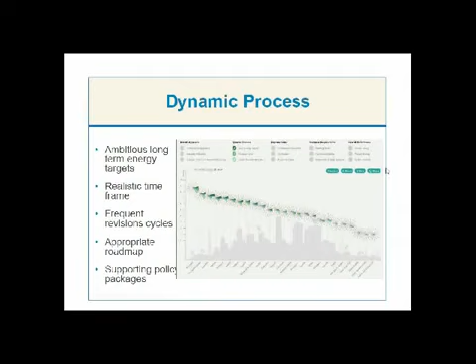How have they established revision cycles and developed appropriate roadmaps? This criteria acknowledges the importance of dynamic process in ensuring significant decrease in energy consumption. As part of the theme, the criterion sub-criteria assessed whether targets set within were set within a realistic time frame and were accompanied by a roadmap that's appropriate for achieving those targets. So you can see here, this is a screenshot of the slide where we've just ticked all of the elements under dynamic process, and you can see how countries have rated under those themes.

This is another screenshot from the website where we've just focused on zero energy targets. And you can see, as I emphasized earlier, some codes have scored well, while others, if they had zero energy targets, they were lacking roadmaps and other supporting measures. But there's definitely a lot to be learned from the codes that have scored well here.

Revision cycles, this is another screenshot from the website. You can see again that there's some good examples of best practice. Well, we can certainly learn in other areas from other codes.

As part of the dynamic process, we also considered levels beyond the minimum standards set within the code. And we wanted to see if these levels have been encouraged by labeling or certification schemes, and if code developers were encouraging developers to clearly define classes and exceed the minimum standards set within the code.

To conclude with, there's clearly a need for stronger energy targets that are supported by frequent revision cycles in a number of jurisdictions. While on the other hand, we've seen that there are a lot of positive examples out there, and we'd really like to learn from these positive and practical examples and to see how countries have been implementing these targets and revision cycles.

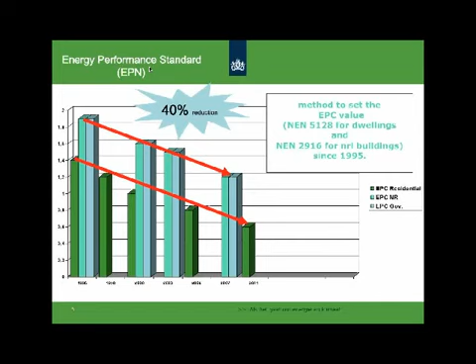That's quite a sufficient number.

If we look to the future, at the moment we are working towards what we call the road to 2020, because in 2020 we want to go to really zero energy buildings.

Both the Netherlands as well as the European Union have set targets to reach this goal, and the graphic shows the way to that zero energy target over the years. So we have an EPC at the moment of 0.6, and we go in 2015 to 0.4, then 2018 to 0.2, and then finally in 2020 to 0. I will explain later what that means.

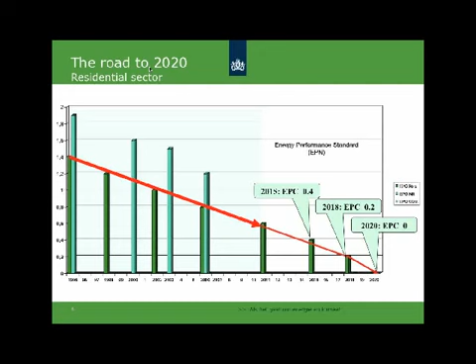For the non-residential sector, we have a more or less same approach. What you can see here is that for new governmental buildings, we want to reach the near-zero energy building, or EPC 0 level, at 2018 to set an example for the commercial sector. And these are also the targets we set European-wide.

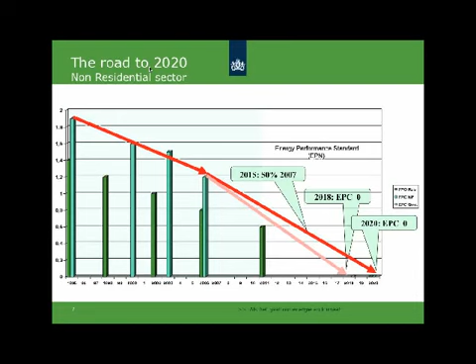I think Kevin will show figures like this later in his presentation. How do we do that? Because you can say, okay, we just lower the target or raise the target, just as you see it. But what's the approach behind that? How are we setting the height of the EP requirements?

Well, we started with the development of a set of reference buildings reflecting the Dutch building stock. Then we calculate the cost and savings related to the proposed energy performance level. That gives you an idea how much it costs to get higher quality in the market, and what will be the savings, not only in energy but especially in cost, related to these investments. So that gives you really an idea whether it's cost effective or not, how much it will cost, and who should pay for this.

In the more political decision-making process, we start with these feasibility studies, and in my opinion the most important part is consulting the building sector. Not only the building sector, but also consulting with representatives from the housing and social housing sector. Only once this consulting is finalized do we go to parliament for political approval. So it's not that the government sets the goals and says, okay market, go on whatever it costs, but it's really an interaction between market and politicians to get this done.

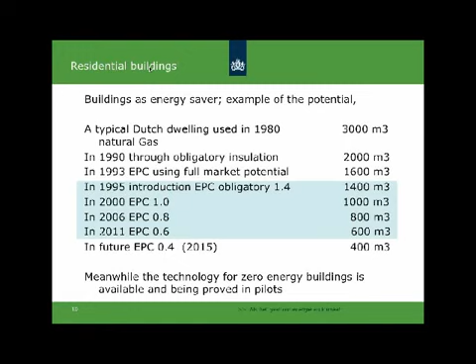Now at this moment we are at level 0.6, and the average consumption for new houses built under these codes is now around 600 cubic meters. So a huge saving has already been achieved. In this next graphic you see the same figures but shown as a graph.

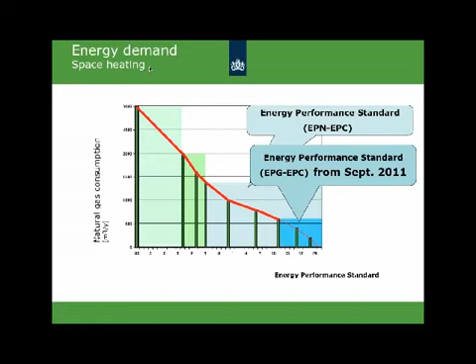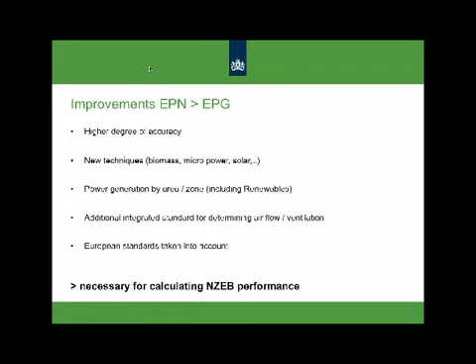Can we go on like this successfully towards the EPC zero or zero energy buildings? The answer is no, as we found out in 2010 or so. We found out that we need more detailed calculation methods, and therefore we introduced a new set of norms to get this point right. Because if you go with a very rough calculation method, it's very difficult to calculate the specific and very small savings at the end of the line going to zero energy buildings. So what we achieved was a new system with a higher degree of accuracy. New techniques were put in: biomass, micro power, solar systems and so on. Also power generation nearby houses were included. So you get a much more detailed and much more complicated methodology, but it was and is necessary to calculate near to zero energy buildings.

The interim observations at the moment, after working with this new methodology for a few years, is that it's future-proof. So this is what we will use to go to near to zero energy buildings. The steps and legislations are set. The Parliament has approved the whole road to 2020 based on this methodology, and the techniques are available. We already have a lot of houses that meet the near to zero energy building level at the moment, and very importantly, the political will is there, but will the market be ready on time? Because you can build these houses on a small scale, but can it be built on a bigger scale? And is it affordable?

What we do to get there, or to get more ideas, we launched a series of national programs and activities focusing on knowledge development and transfer, product innovation, and reducing financial barriers. I'll show you in this graph an overview of the activities which are running at the moment in the Netherlands.

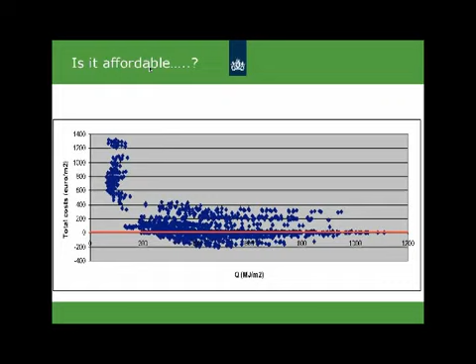I'll show you a graph now that explains a bit what's going on. On the horizontal line, X, you find the energy consumption per square meter. On the vertical axis, the total investment cost to get measures done to reach that lower energy consumption per square meter. If you look at where we are standing now, the red box on the graph is the area where we are going in now. That's the area where we need more costly measures to reach the near to zero energy goal. As we say in Holland, we are more or less climbing the mountain, and at this moment we are on the Hillary Step on Mount Everest. So it's becoming more and more difficult at this moment.

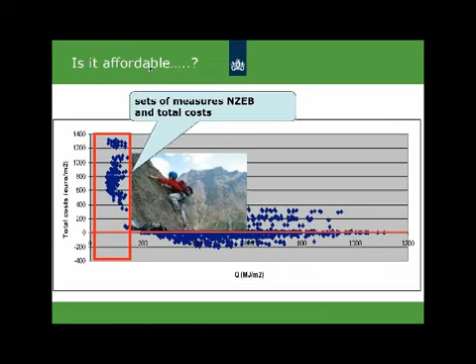But we have a methodology that gives us a good opportunity to communicate with all the involved parties and to find out what the market, what the politicians are willing to pay for the energy saving and to reach the zero energy target. The big uncertainty in this whole thing is the development of energy prices, because this will dramatically influence the outcome of the future cost optimality studies. And the question is, of course, will there really be a political will to go for the environmental targets if the balance between cost and benefits will not be in complete balance.

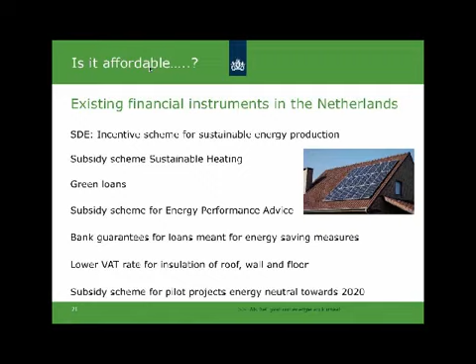Well, how do we get it affordable? At this moment, we have a lot of subsidy schemes running. That's an old approach, just buying the energy saving or closing the gap between savings and investment cost. But we see in the last few years good signs, and the good signs are that there are more and more green loans getting on the market, and we see all kinds of more market-driven solutions coming up. So I'm very positive that at the end we will reach the near to zero energy targets and the environmental targets. Because if you look at it,

the question is not if it's affordable, but maybe more, is it affordable not to go in this direction? And I hope that at 2020 the Netherlands landscape will be enriched with modern versions of our beautiful windmills, and we will get it done.

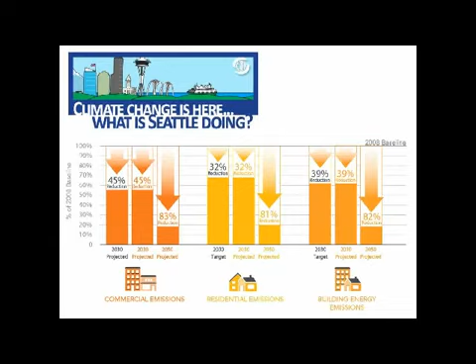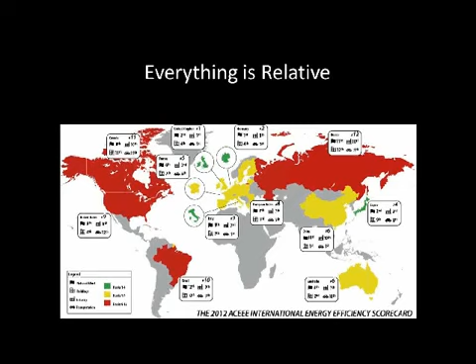We're very proud of our accomplishments here in Seattle, but if you look at them from a worldwide perspective, we're only doing well in comparison to some of the worst energy wasters in the world. So we always thank Canada and Russia, since they're the only countries with worse performing buildings than we have.

Politics and money are tightly connected. It's another good reason to make a strong business case for your code proposals. It's easy to make ambitious plans when everybody is making money, but much harder to do it when the economy is doing badly.

This is a bit strange because the best thing we could do for our local economy in the long run is to send less money overseas for fuel. The trouble is that in the short run, it costs more for businesses to change their practice than to stick with their normal practice. And climate change seems like it's a long way off in the future compared with the survival of your business this year.

So to make real progress, you need to frame the arguments so that both the environmentalists and the business leaders see an advantage for themselves. This is politically tricky.

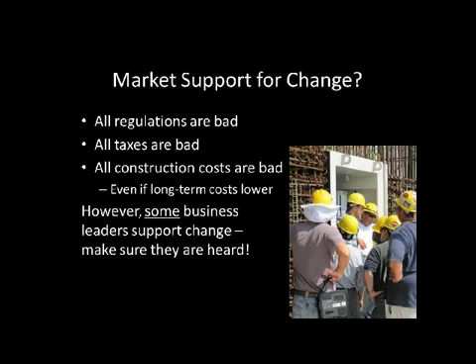Working with builders and building owners is a good thing. If we're going to develop policies that impact the construction industry, it's good discipline to prove that the energy savings will outweigh any additional construction costs. And perhaps our financiers will start valuing energy efficiency as well.

And finally, if we place a label on each building showing how well it performs, like the Michelin rating for a restaurant, the public might start valuing efficiency as well.

Anything that becomes a code requirement tends to drop in cost from what it was before, because it rapidly goes from being a special order to being a standard practice.

Since our tax policies in the U.S. keep energy costs very low compared with most of the world, it's even more difficult for us to present a business case for efficient buildings. For those of you in countries where energy is expensive, it's much easier to convince politicians and building owners of the value of energy efficiency. So tax policy is a big deal there.

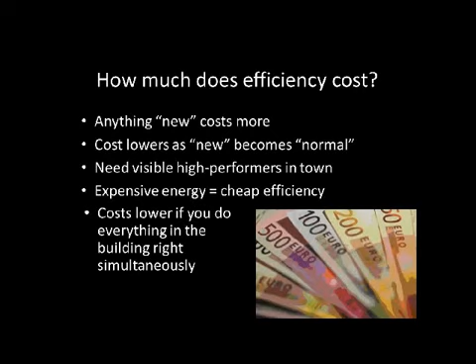Next, I want to go through a few of the new code requirements we enacted in Seattle this year. The first, our target performance path, is a simplified energy code, inspired by Denmark, that simply sets an energy use target for each building type and leaves it up to the design team to find a way to hit that target any way they like. The team submits an energy model to get their building permit, and after construction we track their building's energy use until they operate for a full year within their energy frame.

Here in the U.S. we have to do this second part because our energy is so cheap that there's not otherwise much motivation to pay attention to our gas and electric bills. I looked it up, and electricity in Denmark is about 6 times the cost it is here in Seattle. So it's much easier to get people in expensive electricity areas to pay attention to that than it is here, where we have electricity pretty much coming off of our mountains all the time.

Commissioning is our word for an independently verified study of a new building showing that all of the energy systems work as they were intended. The problems that commissioning agents discover are sometimes quite shocking. This process extends well past the construction phase and into the building occupancy phase. So Seattle now requires a separate permit to ensure that all the systems are tested and working properly together, even well after the tenants move into the building.

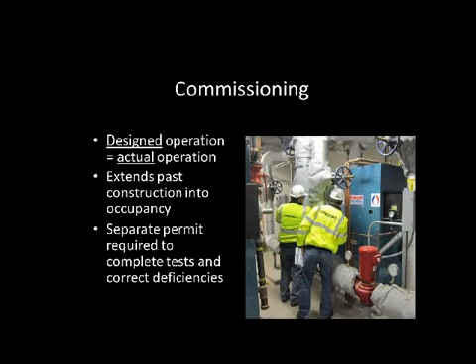When a building undergoes an extensive renovation, something that really extends the life of the building, we now require that its energy performance reach nearly the standards for new buildings. There will never be a more economical moment to improve the building's performance. And if such a huge change to a building only happens once every 40 years or so, we can't wait another 40 years to get to that point. These projects might also be able to use that target performance path I mentioned earlier.

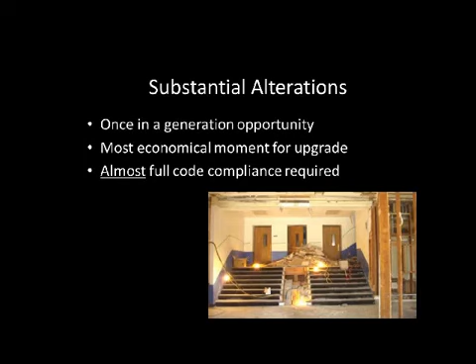Solar PV is one of the only things in the entire building construction industry that's getting cheaper as we go forward. So saving that money for a few years down the road might be a smart investment, putting money now into just making the building envelope function well.

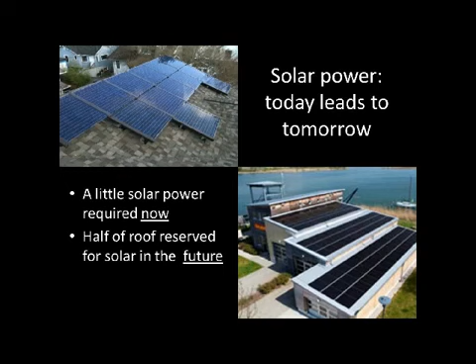Seattle already requires an advanced metering system in each building so building managers can track their energy use in real time. This new rule requires tenant spaces that fill at least a full floor of a building to provide a separate dashboard for the tenant itself to monitor their own energy use. The idea is that building management doesn't have much control over what's going on within the tenant space, but a tenant who can see an hourly basis of how their energy use compares to this week last year has a much better chance of studying that.

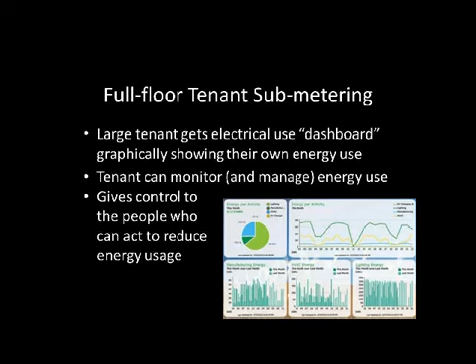The plug load rule requires offices and classrooms to have half of their electric outlets controlled with occupancy sensors or automatic time clocks, just as we do for lighting systems now. This way, there will be one controlled outlet next to each standard outlet. Electrical loads plugged into the controlled outlets will turn completely off when no one's using them.

Now that we've seen that newer buildings are getting more efficient as far as their other systems, the plug loads represent more than a third of the total energy use in a commercial building. So anything that could reduce that energy significantly is going to be a significant reduction for the overall building energy use.

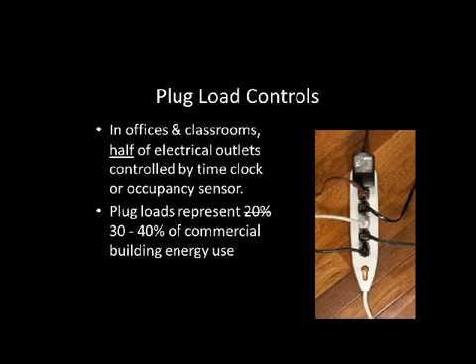So finally, while America is busy making up progress in little steps, the oceans and atmospheres are still relentlessly warming up. So to get from this state of affairs to net zero energy buildings...

For focusing on results, my strong belief is that the U.S. needs to transition away from our prescriptive energy codes and towards performance-based and verified building energy standards. We need hundreds of buildings that use very little energy and are economical to build, but that also provide great beauty and comfort. You can't have your high-efficiency buildings be ugly or uncomfortable. This will change what everyone thinks of as normal and make it easier to bring the minimum code standard up to a higher level in the next cycle.

And finally, we can speed up our progress tremendously if we engage those groups that oppose such regulations and listen to them and learn from them. When our arguments become strong enough and convincing enough that our adversaries adopt them as well, then we'll know we're doing it right. So thank you very much, and do stay in touch.

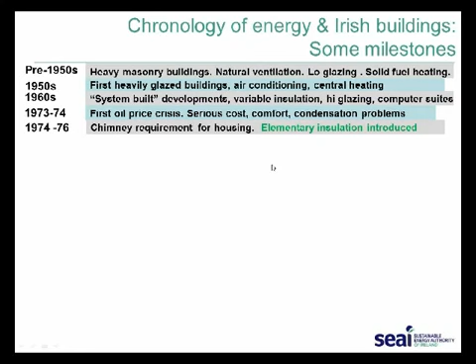There's a long chronology attaching to this whole story, and we started from a very low base in the late 70s in Ireland, when elementary insulation first got introduced, and that was purely at elemental level. I think attic insulation or roof insulation was the first. That got a little bit strengthened in the early 80s, but once the crisis receded, we ended up with something of a business as usual, a gradualist approach to improvement.

We had about 78%, I think, at one point, of Irish homes in the late 80s reliant on solid fuel heating systems, predominantly open appliances with efficiencies of less than 50% as their main source of heating. So we were starting, just 25 years ago, from a relatively poor base.

We've had, since 1991, the first introduction of formal building regulations, which strengthened the elemental U values somewhat further. And those got strengthened further in 1997 with the introduction, for the first time, of a building energy calculation method for overall energy in buildings, a performance approach, if you like.

But the real progress has been made quite strongly over the last 15 years. We got a further strengthening in 2002, but we've had a significant change in impetus since the middle of the last decade. I won't go through this in detail, but just because I will be touching on some of this later on.

I suppose we've had the introduction of building energy rating, we've introduced incentive schemes, strengthening of energy standards 5 times in the past 15 years overall, with the introduction of renewable energy obligation, and energy efficiency retrofit or renovation programs introduced for housing and other sectors in the past 5 years also.

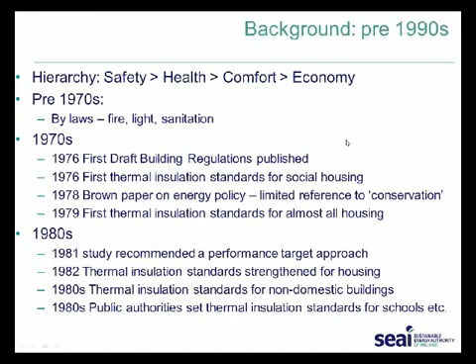I won't dwell on the history up to the end of the 1980s in the interest of time. But the important point as far as targets is concerned is that targets first found their way into formal policy in 1997, even though I was part of a study group that recommended it back in 1981. So that just tells how long and how much inertia there was in the system back at that time.

But in the 90s, we got the National Climate Change Strategy, the Green Paper on sustainable energy. SEAI was effectively established, its precursor was established in the mid-1990s, and fuel poverty began to be addressed. We saw a greater groundswell of public consensus and indeed industry receptiveness to more progressive energy standards.

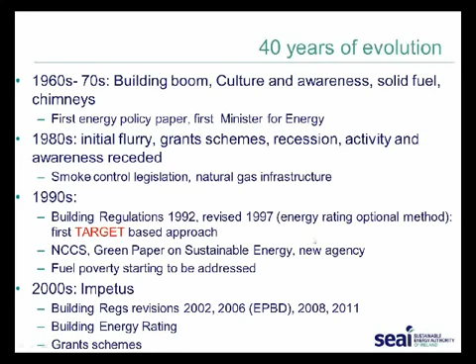The building regulations, the most recent variations on them for housing, had introduced energy and carbon performance targets from 2006 onwards. The 2 steps, 2008 to 2011, reduced energy consumption and CO2 emissions by 60% relative to the mid-2000s.

We've introduced a mandatory renewable energy contribution per square meter of 10 kilowatt hours thermal or 4 kilowatt hours electrical, introduction of thermal bridging and air permeability criteria, particular limits on efficiencies of heating systems, and particular measures on space and hot water. And another element I should include is that lighting is very much part of the methodology.

So the actual computation procedure for determining this is primary energy per square meter for space heating, water heating, associated electrical mechanical power for pumps and fans, and lighting. And it's primary energy, where the typical primary energy factor for electricity is 2.5.

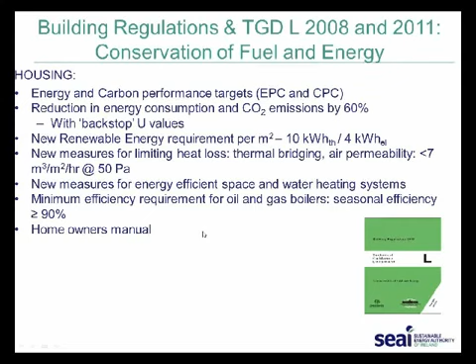So broadly similar approach has been taken in non-domestic buildings, but there hasn't been the same aggression in the strengthening of the standards. But there has been a codification and a systematization of the requirements in the right direction, and currently there is a review initiated by the Ministry for the Environment of the standards for non-domestic.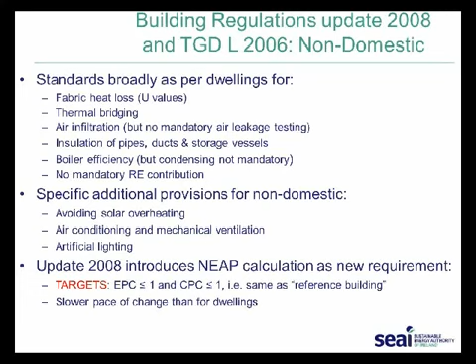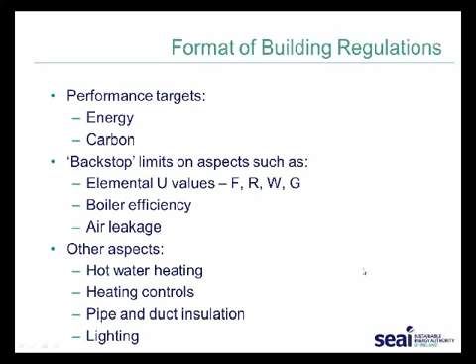Apart from the performance targets in energy and carbon, there are backstop limits on aspects such as elemental U values, boiler efficiency and air leakage, and we've had hot water heating controls, pipe and duct insulation and lighting covered as well. The building energy rating got introduced on foot of the Energy Performance of Buildings Directive in 2006.

It was late 2006. It was formally legislated for, but it effectively began to get traction seriously at the end of 2008. The same common methodology is used for this as for the building energy performance figures, and I think this is all pretty familiar to anybody in Europe. For those of you outside Europe, I think this is, again, rather familiar.

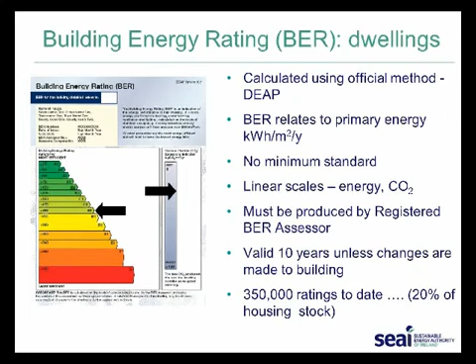What's significant here is that we've had over 350,000 building energy, home energy ratings in the period since, in less than 5 years, which represents 1/5 of our housing stock, which I think is quite a considerable pace of building energy ratings. I think it has had a very strong empowering impact in the market, and there have been studies showing that it has impacted on prices. And one of the things that building energy rating tends to favor is it gives something of a market edge to new dwellings over existing in terms of the energy dimension of their performance.

This is the outcome of the progression in standards as an indicative outcome, where on the right-hand side I'm showing the relative building energy ratings from A to F, A being best, and you're seeing that we've migrated from a level in the mid to early part of the last decade of about 156 kilowatt hours per square meter primary energy, down to 63 kilowatt hours per square meter primary energy today in the standards. And with the near zero, cost optimal studies are indicating that a figure of the order of 40 kilowatt hours per square meter

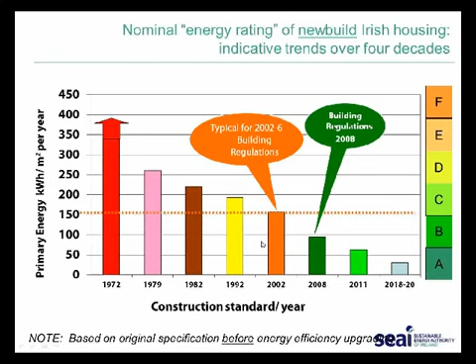constitutes a near zero energy building as far as the EPBD recast is concerned. But I'm sure that's very much open for debate at the moment. So we've had this progression through these steps, and we're now heading for near zero.

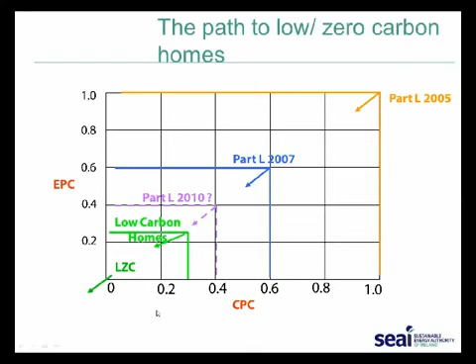Another way of representing this is just looking at the energy and carbon indices, and we've been moving down all the time from a ratio, if you like, of 1. We set the benchmark or the datum level in 2005, and are moving down towards low zero carbon, or energy positive buildings, hopefully in the next decade, or well, within this decade.

So there were 4 questions I was asked to address. Number one, what are the market conditions at the time of the targets being set and introduced? I suppose they were very buoyant in Ireland in the mid-90s. Ireland went through an unhealthy construction boom from the mid to late 90s right through to about 2006, 2007. So we had a lot of industry innovation and confidence in that market.

We had a lot of competition on energy standards between the masonry and timber frame sectors. It was becoming very, very visible. Ireland is a very open economy. There's a lot of exposure of the construction industry players to having worked abroad, and there was a lot of internationalist influence, and technology change, less of a fear than there might have been in the past of innovation in the construction sector. That would have been derivative too from other sectors of the economy, in which we had extremely rapid change. We have a very, very strong ICT sector in Ireland.

Was it a struggle to get support from the market, and if so, how did we manage to get them? Much less struggle, much less inertia than in earlier decades. There was a general greening of societal attitudes, I would suggest, in that period. Again, we're a very open economy, very much open to the world. We're a small country which hears a lot of the global debates.

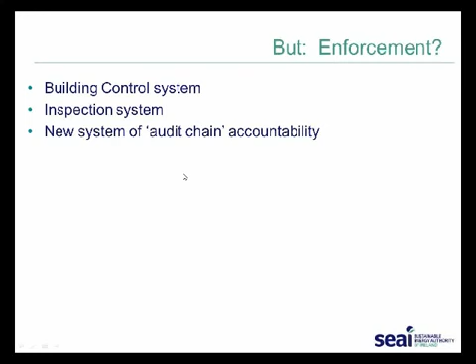What impact? What has been the outcome of all of this? We're seeing, roughly speaking, an 18% reduction in energy use per dwelling. Now, this isn't all attributable to building regulations, as I'll point out in a minute, but there's been quite a dramatic change in the period 2006-2011 in the study that we published just two months ago.

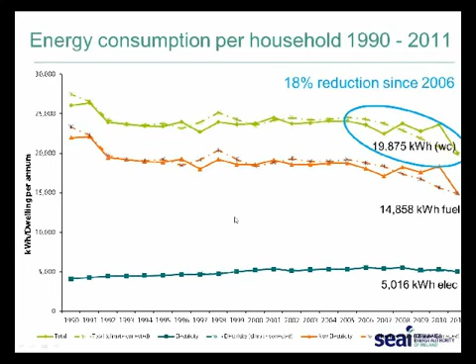This shows the average dwelling energy consumption has fallen by that much, not just in fuel, mainly in fuel, but also in electricity. We have seen the trajectory of CO2 emissions per dwelling falling from about 10.6 down to, I think, 6.4 tons per dwelling.

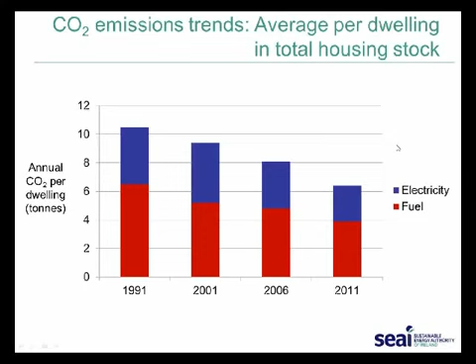The decarbonisation of electricity has certainly helped, but we see the thermal component has equally fallen significantly across the whole building stock. Overall, across the stock, using the EU Odyssee methodology, the pace of improvement in the energy efficiency index of the dwelling stock has more than trebled in the period since 2006 relative to the previous 11 years.

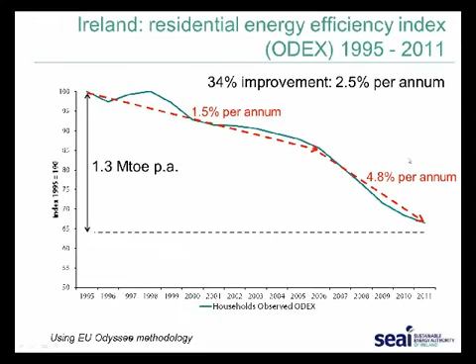When we analyze this, there are three major contributory factors: new build, let's call it asset quality through the building codes; retrofit upgrading, which has been very aggressive - we've had 250,000 of our homes retrofitted in the past 4 years; and behavior change, which would include responses to both economic downturn and energy prices, but also many other DIY type actions taken by people.

The roadmap to looking at the next steps, roadmap to 2050. This is a document we published, I think, nearly 3 years ago, as a kind of envisioning of the future pathways towards both new build standards, obviously going to near zero and below, and upgrading of the existing stock.

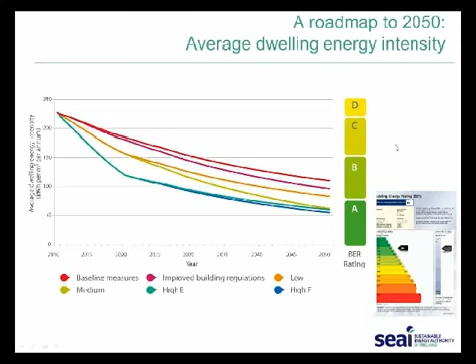Live challenges: that major emphasis on retrofit renovation, the enforcement regime, and the whole question of the cost dimension to cost optimum methodology, which I think Hans has particularly referred to in his closing remarks. When it comes to that methodology, we have a challenge in relation to setting new codes as to whether we do them on the basis of energy prices or carbon prices - snapshots of what they currently are - and assess cost effectiveness on that basis, or on the basis of projected energy or carbon prices, or indeed renewable energy components in the electricity mix over the lifetime of the building.

Do you look to a 30-year time horizon, and do you accept these types of trajectories that are being proposed, say, in smart grid or renewable integration expectations? So that's a huge challenge, I think, not particular to Ireland, but for most countries.

So approaches to renewable energy integration: what are the best approaches? What flexibility - on-site, off-site? As I said, smart grid and smart cities, and the treatment of electricity and the primary energy ingredient. The need for more attention to non-domestic buildings, and of course the skills challenge.

I suppose in all of this, regulation does drive innovation - I think this remark was made earlier. We see the example in window standards. It's now cheaper to get a double-glazed window, or not yet a triple-glazed window, than a single-glazed one. Hopefully the day will come when triple-glazed windows to passive house type standards will be as cheap, or nearly as cheap, as double-glazed windows.

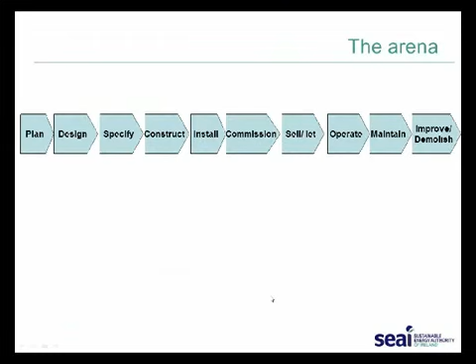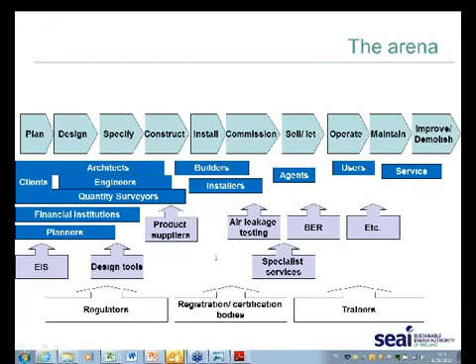We have all of these players who are playing on the stage or in the orchestra. We have all of these other now specialist service providers coming in, and tools to try and support them. And then we have the oversight and infrastructure, if you like, through registration and regulation trainings. Very, very complex arena, huge challenge. It's not just the skills of those on site, it's the skills of all of these other players as well, and the infiltration of these skills consistently across the industry and the behavior of the industry. So it's a supply chain, skills chain, quality chain issue.

So if I was to summarize in terms of what have been the success factors, or what led to what I'd call making sense of the past, there have been the ingredients of leadership, political consensus, a target-setting approach informed by evidence, and an environment of confidence - confidence not just in the business case, but confidence in the wisdom of the whole thing. Capacity to adapt and innovate, skills and enforcement are more challenging, and I suppose the core of it is approaches of partnership among stakeholders, policy support, and evidence.

So I think that concludes my presentation. Thank you very much.